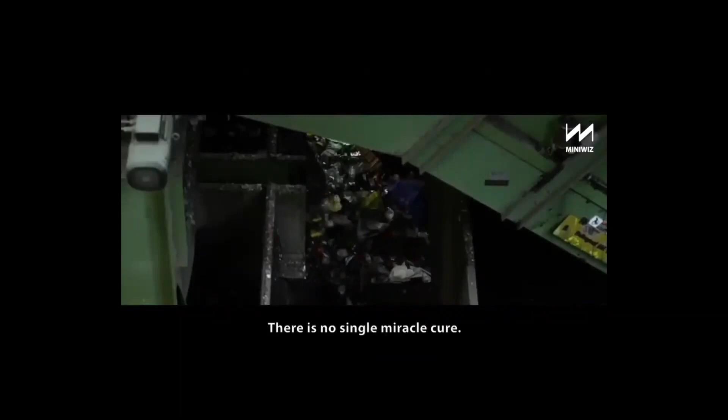But in general, we've been around for... we want to matter to the non-toxic future of our world. At Miniwiz, it is our mission to change consumer behavior into a circular one. It is the only way for us as a species to sustainably consume our limited resources. Overconsumption is a complex system problem - there is no single miracle cure. We want to matter by proving human consumption can be satiated with our very own trash. We have dedicated ourselves to turning decades of environmental pollution into solutions that will enable us to live sustainably. We want to matter, so we turn ourselves into magicians of trash, inventing new ways of transforming our everyday trash into high-performance works of art.

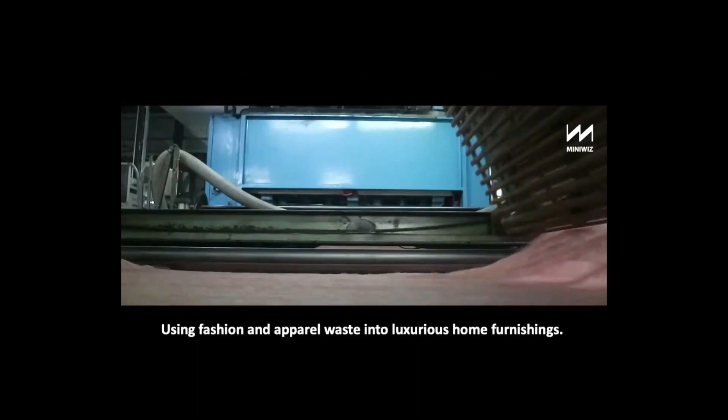We turn milk packaging into the hottest sportswear fashion, plastic bottles into luxurious textile, cigarette butts into furniture and glasses, using fashion and apparel waste into luxurious home furnishings, masks and PPE into cell phone chargers, single-use medical waste material into hospitals, using smart AI technology to make decentralized recycling and upcycling possible today. We head to Taiwan for this report - a company designing solutions to overcome a mounting problem of a mountain of trash. From furniture to hospital wards, all built from waste, one CEO is on a mission to revolutionize recycling. His team has used waste to develop over 1,200 different materials for use in construction, turning different kinds of waste, like plastic bottles, into materials for buildings and products across the world. We want to matter, but unfortunately we are out of time. Please join us in upcycling today's local pollution into circular ESG building solutions of the future.

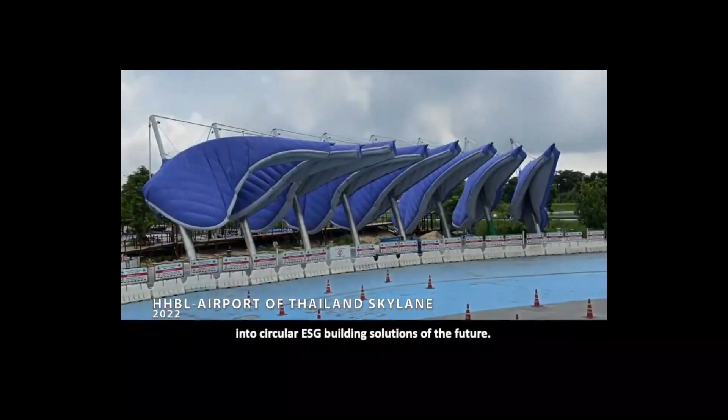Okay, so first of all, are you guys all confused with how you recycle these? Do we put them in the recycle bin or not - the coffee cups? I mean, obviously it's a trick question, and you guys are a bunch of engineers, looks like, yeah? So it's a trick question - do we put them in the recycle bin or not?

Yes, I see nodding in heads. But welcome, these days are internet societies, you can check. Can you recycle coffee cups or not? Paper ones? No, you cannot.

First of all, it's contaminated with organic waste. Second, it has a plastic film in there, and you need a dedicated recycling line. On top is polypropylene, which is a cap, and normally you have to put it separately. Does Singapore recycle those? Nah, definitely not. So anytime you see a recyclable coffee cup, that's greenwashing.

And that's what we are fighting against, actually. There's a lot of greenwashing, but greenwashing is good, because without it you cannot even get to what we are trying to do now, okay?

People talk about microplastic. If you don't recycle your coffee cup properly, all those little bits and pieces of PE actually get broken down and become microplastic. On all the beaches, this is the stuff you can see. At the molecule level it's actually quite a big chunk, you can still collect them.

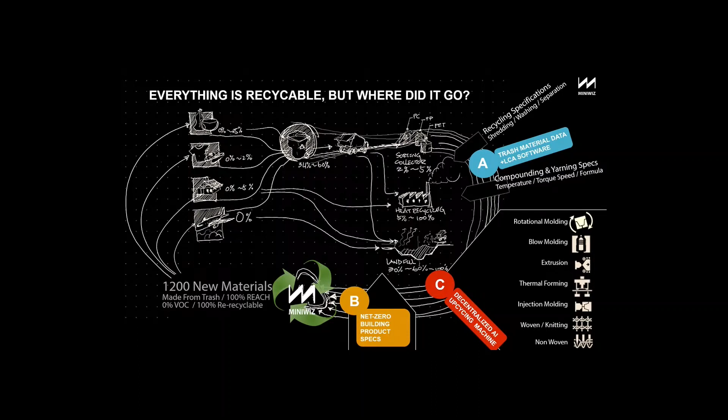And why architecture? I think this is very self-explanatory. All the carbon footprint is in building, 50%, or it doesn't matter how you calculate it, 39%, 40%, doesn't matter which data you use. Basically, it's the highest single industry that uses the most carbon footprint. Okay, so period.

Unfortunately, why do very few companies do this? I don't know, actually. But I think there's one very simple fact, is there's no money in it. The second thing is it's really difficult to get in. Have you guys tried to build your building before? Anyone here? It's not easy. If you try to build your building, there's a lot of suppliers and lots of problems with legal stuff. So it's a very chaotic market, and also has lots of status quo in between.

And we're going to build more buildings until 2060. And where is most of that building going? It's not in China. Do you see that bubble, the biggest one? Africa. That's where most of the building activity is going to happen.

So if you're going to decarbonize, you want to reduce carbon. By the way, reduce, reuse, recycle. The easiest way for you to reduce carbon is reduce. Just don't use carbon, right? Use as little as possible, right? So this is what we do.

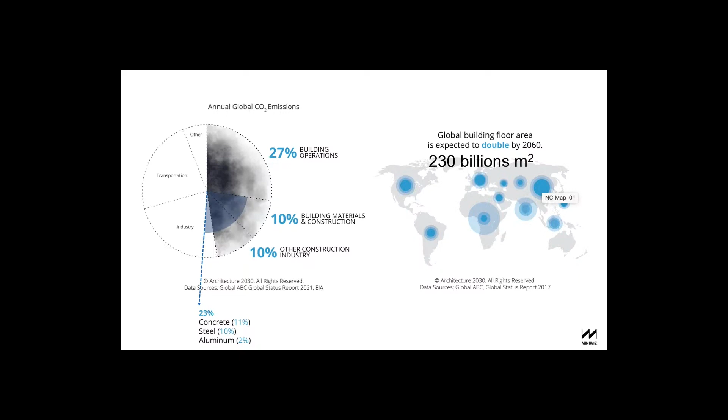So I kind of basically summarize for you. We only do A and B and C, which is data and software. So you're able to calculate when you use this material, what type of carbon footprint is happening, and how is that linking to all the different engineering data. The second is obviously B, which is building product that has a different set of specifications that can already be pre-chewed and pre-manufactured into different locations.

Decentralizing is the key. If you actually ship trash around, like what I was talking about the bag, horrible. That is the antithesis of what we are trying to do. C is then you have to scale those machines locally in a very efficient way.

And we have to link that into a real estate development life cycle. A lot of people forget that what they're selling into, you're selling into the biggest user of material, real estate companies. And real estate companies, the one guy they are most scared of is the government. Because the land is from the government, it has public goods, it's public facing, it's permanent, it's linked to tax policies. You got to think about it. That is the one single thing, so that's why with real estate developers, if you want to talk to them, you better be talking to the government.

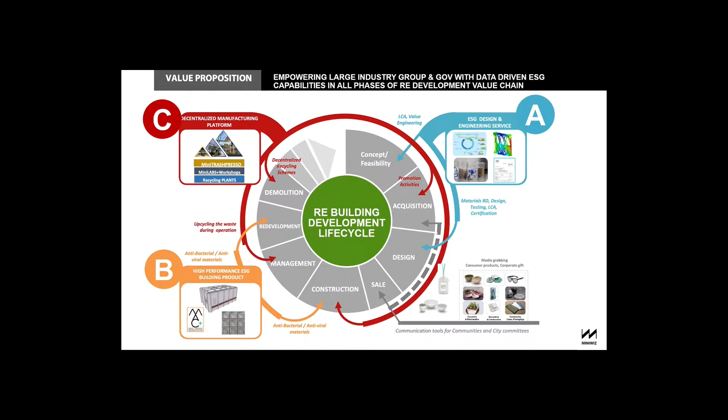And you don't want to scale what other people can do better than you. You only scale the part where we accumulate enough knowledge to add value. So we only scale that part, I think I summarized there.

But we can work with lots of creative communities. We work with, for example, the famous Dutch architect, famous Norwegian architects, Snohetta. We work with Zaha Hadid, and we help them deliver certain low carbon modules within their buildings.

And we built a lot of infrastructure buildings before, and that's where we got our thing. This is the biggest e-waste recycling plant. It has 6 plants inside, one of a big university campus. I just want to point out the machine. There's a solar power machine there. It's actually Jackie Chan's university.

So he says nobody's using DVDs anymore. So can we recycle DVDs? So we recycle DVDs on site using solar energy and process that whole thing into the facade of this university campus. So the facade is actually made directly on site.

And of course, you want to use the most abundant resources that are available to you locally. So this is in a Thailand airport. This is actually quite big, giant air mattresses, 2,000 square meters with 8 columns. And how is this supported? Air. We're using air as a mechanical tube, yeah? And then we have recycled polyester, 2,000 denier, structural strength, to be able to power that.

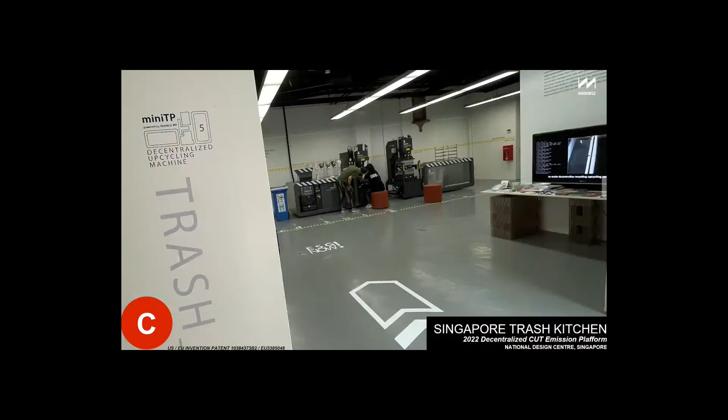Where trash happens. And this was in Singapore Trash Kitchen. This was in the National Design Centre. Now it's in Sentosa. Hopefully you will see an activation in Sentosa permanently there soon. And this is in Taipei, where we link with universities.

And of course, everything can be robotic. It's all computer-controlled drones. So pretty much you can make it into anything.

Thailand - this is a smaller size. So basically, this is a baby recycling plant designed to be air transported and fit into elevators. So every machine is just 1 ton, okay? And then they can be folded into a Swiss Army knife, and then pushed into an elevator and an airplane, so we can transport them.

So we have 7 of them around the world. One of them is being set up in Boston, linking with MIT and Harvard, and with Nan Fung Group at their new life science building.

The other one is community size, a village scale, where a community - just imagine HDB housing - can take that trash directly, locally, and directly turn it into something else.

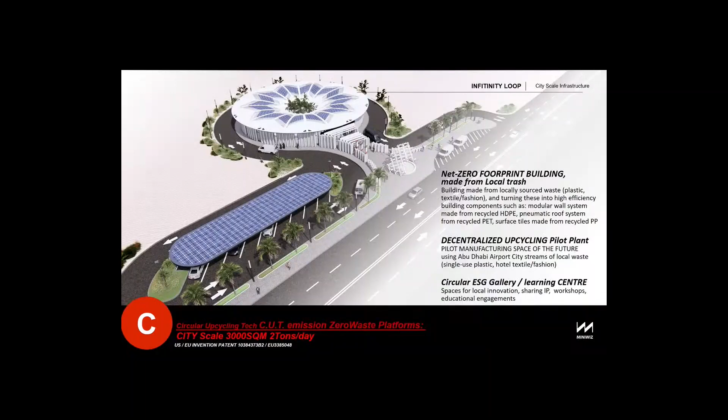And this is what we have in Taiwan, and we are building this in UAE right now - the big ones. So we're currently building much bigger ones there. The next thing is data, how we link that with data. Everyone talks about carbon footprint.

Sustainability is a dirty word, but actually there is a standard started by the Europeans 40 years ago. It's carbon trade, based on ISO 14064, and this has been standardized for the last 30 years, for those who don't know.

There's a lot of greenwashing consultants out there claiming there's so many different ways to calculate carbon footprint. Sorry, there's only one way, and you can actually download it. Please read into that. It looks like a complicated process, but in reality it's just a bunch of data put into a formula, and that formula is very straightforward.

Transportation, energy use, and what is the result of that? You know what's the result of that? The global warming potentials of that data.

And then the next thing is the modularization of all your design, architecture design. Unfortunately architects still design in 2D, which is horrible, yeah? They still draw AutoCAD, it's still single line. Just think about it, single line. The line just has distance data, right? Point to point, 2D. But in reality, you want to get to that, you need to have everything in blocks and 3D. Unfortunately most architecture software, I know there's BIM systems starting, but that's from the engineering side. On the design side, almost not really, okay?

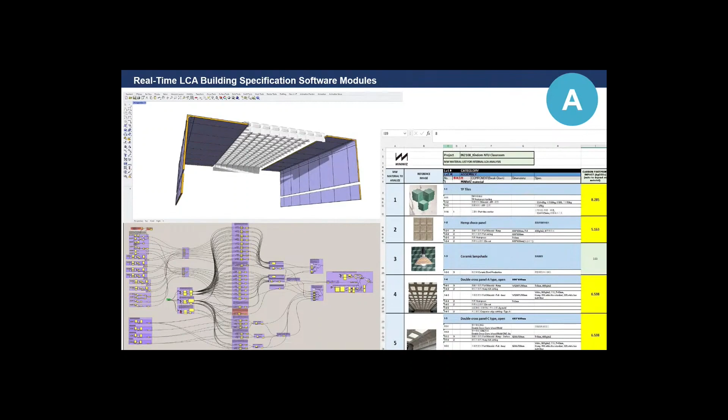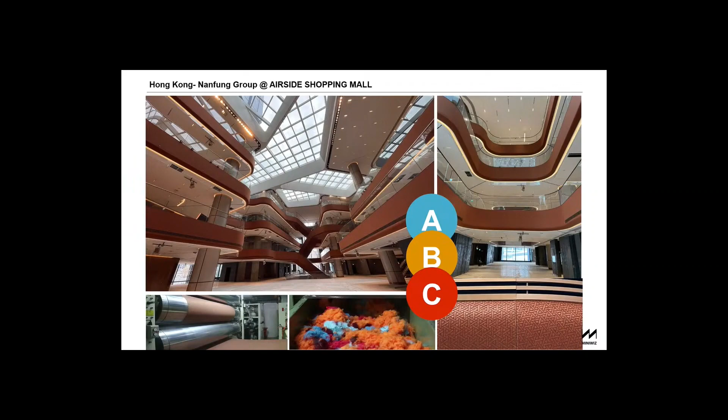And so that you can turn into all these fancy places. I just want to show you all these fancy places that you can build with the same logic. So right away you can do carbon footprint analysis. Salad Stop in Singapore, headquarters of real estate companies, one of the biggest shopping malls currently almost opening in Hong Kong. You can see all that orange and carbon footprint and the modular system I talk about.

The last thing is wherever we go to the local collectors, we want to figure out the local trash ecosystem. I was in Africa, I was in Mozambique. I was just so happy and surprised that in reality the recycling system is actually complete within the plant. It's combining 4 or 5 different companies in Taiwan together, from buying the trash, all the way to sorting, all the way to pelletizing, all the way to the machinery.

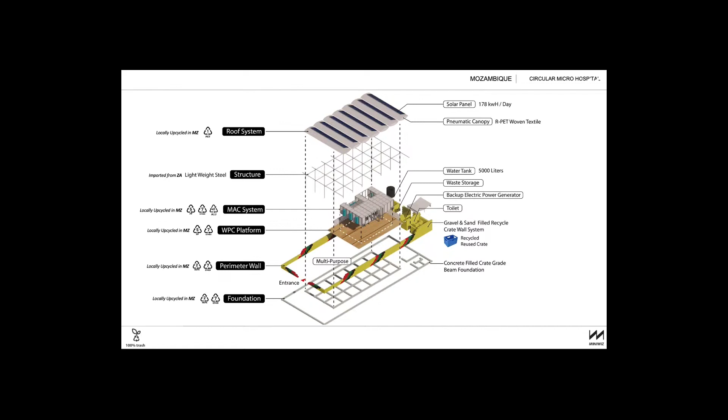And then we are building this for the UN Habitat and with different foundations that's sponsoring these, so they can have these medical grade surgery rooms, ICU rooms, to reduce contamination and increase healthcare. So this is kind of where we are at. We can talk about that more later.

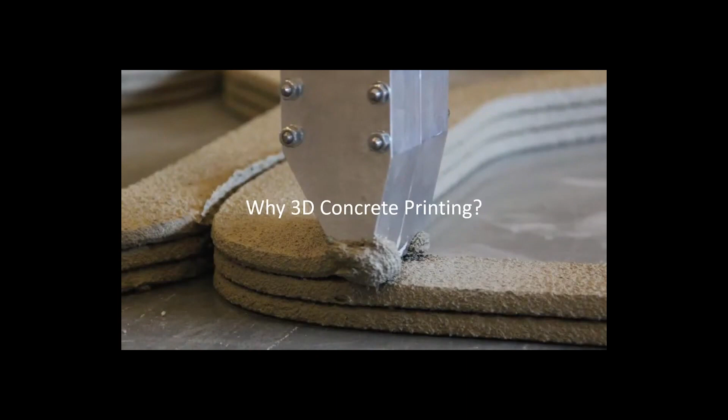And since then, it's still very important to talk about why we do 3D concrete printing.

The first one is really about construction productivity. If we look ahead the next 30 years, we see there's a 30% increase in demand for housing, for infrastructure, and for anything related to the built environment. But we also see there's a minus 30% for the workforce, for the labor. To mitigate these differences, we see that digitalization, automation, and 3D concrete printing can be one of the methods to mitigate these differences.

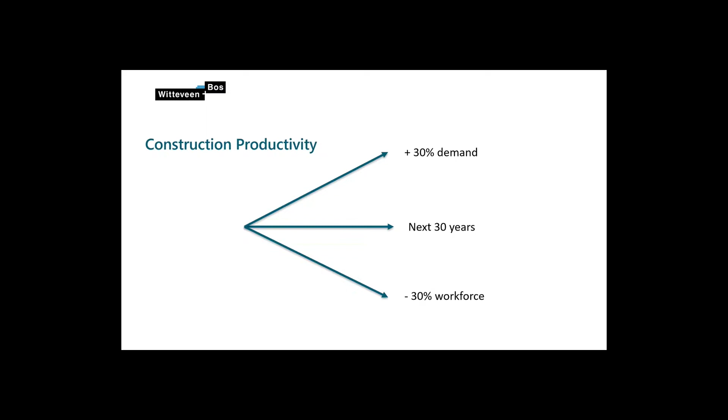Another aspect is the design to construction process. A lot of us still use 2D drawings even though we have BIM and 3D models. Most of the time we produce a 3D model but still generate 2D drawings, hand over documents to the contractor, and the contractor teaches the builder how to build it. So there are many stakeholders involved, many processes, and the process is quite long and complicated.

The reason we do concrete printing, the reason we do digital construction, is we can directly produce and fabricate our built environment using digital data. So it can come from BIM data or a 3D model, and then we translate this digital data into bits and bytes, and use a robot, a 3D printer, to print. So in this process, there's no 2D drawing involved anymore.

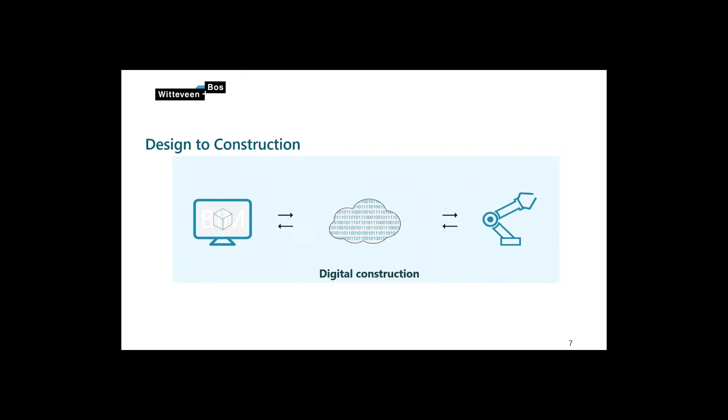Sustainable urban solutions in 3D concrete printing — these are the things we think could add value to our built environment using concrete printing. First, we actually use less material. For example, the bridge we printed in the Netherlands uses around 50% less material compared to a traditional bridge. Less material also means less CO2 emission.

When we print concrete, the biggest difference is that we don't need any formwork. The concrete we print needs to be flowable, from the mixing system to the pumping system, all the way through the hose and through the nozzle to get printed. So the material needs to be flowable enough, but also strong enough to support the layer deposited on top. But there's no formwork anymore.

Traditionally, you have to build a formwork, put the reinforcement in, then cast the concrete. Once the concrete hardens, you remove the formwork. So in a way, you're building your structure twice — first the formwork, second your concrete structure. When we print concrete, there's no formwork anymore.

Fourth, we want less dependency on labor — in concrete printing, the robot can do most of the job for you, streamlining the process from design to production. We also have higher design freedom in shape and texture. Printing a curved shape or a straight one doesn't really make a difference in concrete printing, so you have more freedom in design.

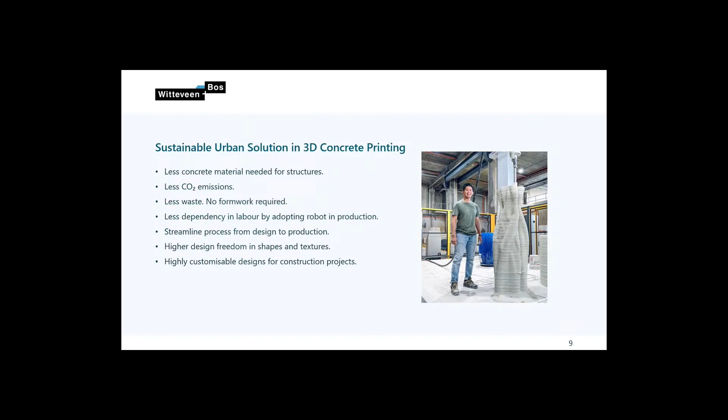But from a technology perspective, this is the challenge: everything we print is fresh concrete, and fresh concrete is like mud. This was supposed to be just a straight cylindrical column, but it buckled and tumbled down. This happens when you print too fast, meaning the material doesn't have enough time to harden and stiffen to support the weight deposited on top. So we cannot print too fast.

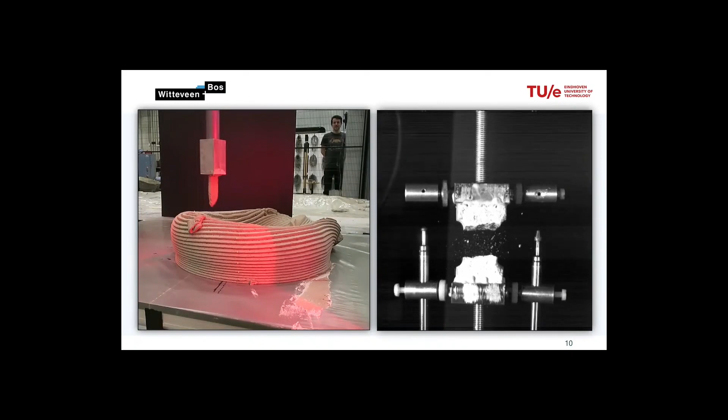But if we print too slow, meaning the layer we printed already dries up, when we lay the next layer on top you don't get any bonding, so we lose structural integrity. But luckily, we can't print too fast, we can't print too slow, but this window is quite large, which gives us flexibility to design.

So this is where research comes into play. We basically use a geotechnical testing method to test our concrete printing material. We had building codes for concrete structures, but we don't have building codes for layer-based extrusion process concrete structures. The biggest difference is that if you print in layers and test it, the structural behavior is actually different in three directions — X, Y, and Z. So we do a lot of research with universities to look at the structural behavior and understand the mechanical properties for use as a structural material.

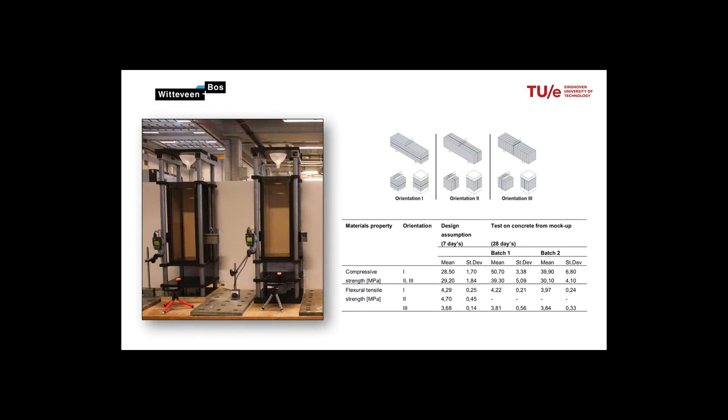So in 2017, we thought, okay, now we understand the material and have it tested, maybe we can try using concrete printing for a real project. The first one we did was a simple piece of urban furniture — a picnic table that we still use in the Netherlands.

And this is the printing process, so layer by layer. You can actually see this is a gantry printer, and the nozzle is always turning to follow the tangent of the print path. We thought, okay, this should be quite easy to print, just print layer by layer to follow the print path, and around 60 layers, then it's finished.

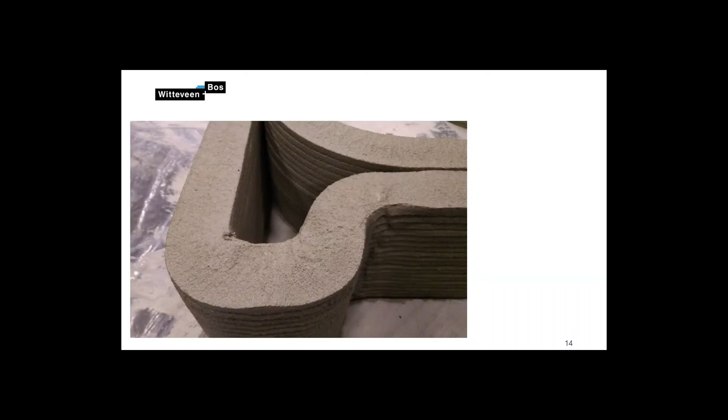But soon enough, we find out something very interesting and very challenging, is the corner. Every time when we have this sharp turning, the sharp corner, and also because the nozzle is always turning to follow the tangent of the print path, this is what happened.

During this turn, the material deposition is different between the inner radius and the outer radius. So the inner radius always got compressed a little bit, and the outer radius always stacked a little bit higher. For one layer, there's no problem. Two layers, there's no problem. But this difference starts to pile up.

And there's 1 layer, 2 layers, 3 layers, and eventually it will collapse. So we really need to take this into consideration and not just think concrete printing can just lay down - it's also about how you adjust your material properties.

So we very quickly used computational design software in Rhino and Grasshopper. When you design the print path, you can immediately see if the curvature is too sharp, which will cause this inner radius and outer radius issue. So when you make the design, you can already analyze it, then know that your design will be printable and will be okay.

And yeah, this is our very first project, just a very simple picnic table. Last year I went there, and it's still in very good condition.

And the next one, we go to an infrastructure project. So this is the very first load-bearing bridge we printed in 2017. It's 8 meters in span, 3.5 meters wide. Not a very interesting design, but we were trying to understand whether it would be possible to use concrete printing for public use, for load-bearing structures. And it actually caused a lot of discussion with the government, and how do you make sure this layered thing is durable?

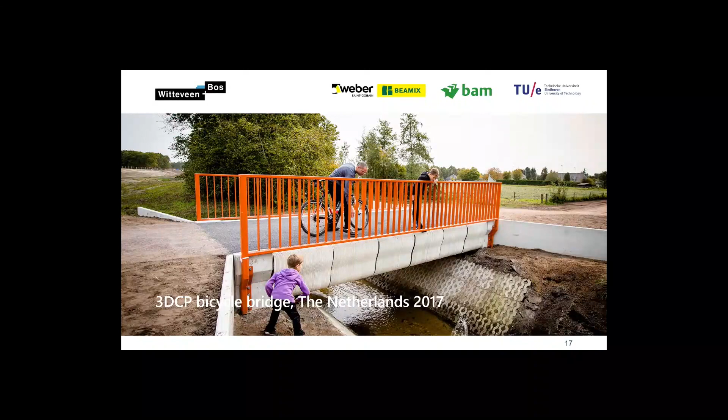So, yeah, everyone had a concern. Everyone wanted to know how can we control this risk, control the uncertainty. So risk is not the issue - the main one is how do you manage your risk.

So before we printed a full-scale bridge, we actually printed a scale bridge, a 50% smaller scale bridge, and we got it tested through destructive testing, using a 4-point bending test. Just trying to understand, does concrete printing structure behave the same as normal concrete? And in the end, yes, it's still concrete material, it's still a concrete structure, it behaves just like concrete.

Then we go to full scale. So this is actually the cross-section of the bridge. We print a honeycomb structure, like a hollow core structure. And also a very big difference is we don't fill it up - we can directly use the printed structure as a structure.

So most people, they only print the skin, they put the reinforcement in, they cast concrete. That is using concrete printing as a permanent formwork, which is good as a step in between. But what we are after is this: just placing the material where it's needed and not filling it up. This can save material, and it also has a customization purpose.

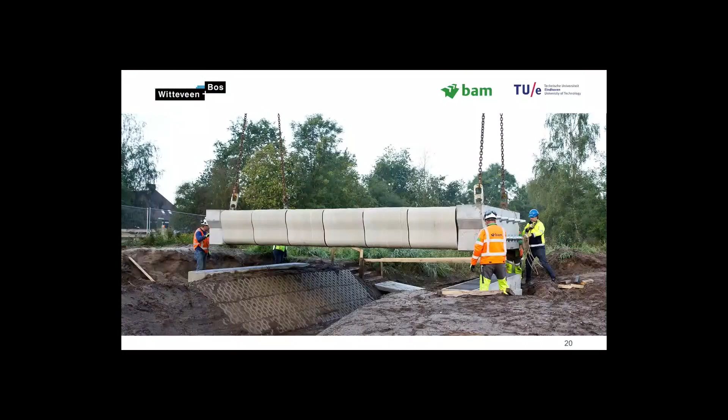And then we put the bridge in position. And finally, since this is the very first concrete printing bridge, everyone had a concern. The first day when we opened the bridge, we invited our contractor, our builder, our engineer.

Cycling is the thing in the Netherlands. We asked them to cycle through, just as a final test, since we did the design engineering and we are liable. We did some cycling and got it through just to prove that we are confident in our design. So we know this very first bridge is not very beautiful, the safety factor is quite high, and it also doesn't really introduce design freedom, but at least it was the first one trying to use the innovation in a real practice project as a load-bearing structure.

The next one, we take this one step further, which is also a bridge, but the span becomes 30 meters, and we introduce this curvy organic geometry that can blend into the environment.

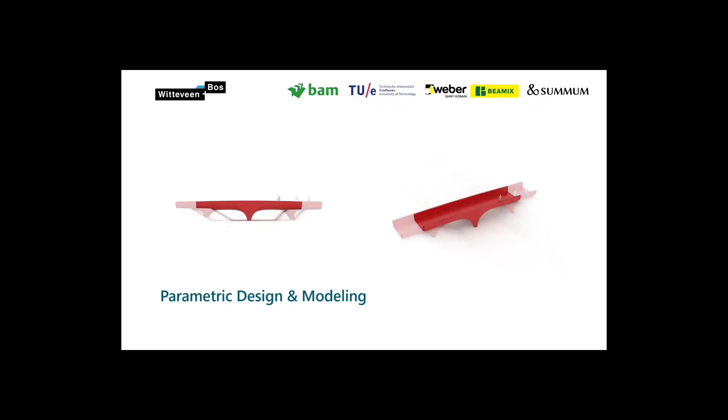And soon we realize that for this kind of concrete printing bridge, it's very important to have a parametric design model that can control, for example, length, width, height, so you don't have to repetitively design every bridge again. Once you have one good parametric design model, you can easily apply what you learned before to the next bridge to save time and focus on what's unique in the next project.

So this is the printing process for one part of the bridge. The printing strategy and pattern is still relatively similar to the previous bridge, still like the honeycomb structure. For example, the left image is the column.

We print it upside down, and during printing, we put this lightweight aggregate to support it because we're still printing fresh concrete. If you have a crazy overhang, it will always collapse. But by introducing this temporary support, that allows you to have more design freedom, different curvature, incline angle to fit with your design purpose.

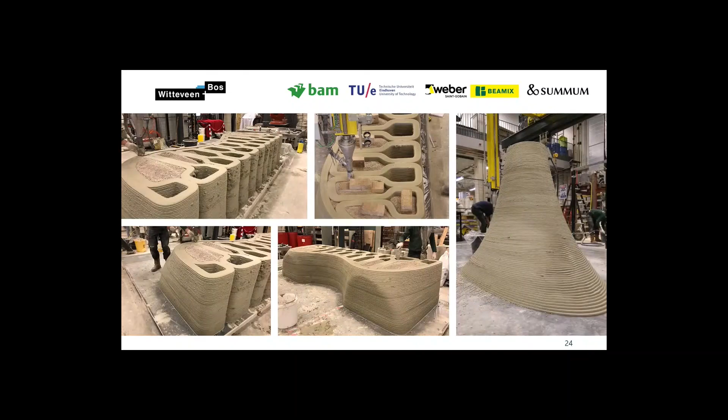So this is during the construction process. Every span is 6 meters, 6 meters, 6 meters, and you can see how nicely the curvature is blended into the printing process. And this is the final bridge.

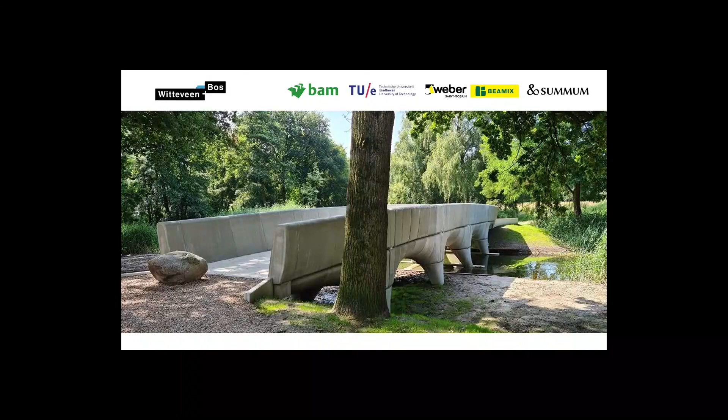So these two bridges and also the picnic table were done in the Netherlands, but we also do all different kinds of concrete printing around the world.

Of course, in Singapore, we always talk about how to push construction productivity, how can we reduce the dependency on labor. And in 2018 to 2022, we actually worked on this 3D concrete printing project for HDB.

And the very first task was: how can we print concrete? Because Singapore, unlike the Netherlands, doesn't have a winter time and summertime. In the Netherlands, during different seasons, we use different parameters to print concrete. But in Singapore, the weather is actually quite stable, quite constant. It's always hot, always humid, and we figured out Singapore is actually relatively easier to print because the environment is very stable. It's humid, so that's good for concrete printing to cure.

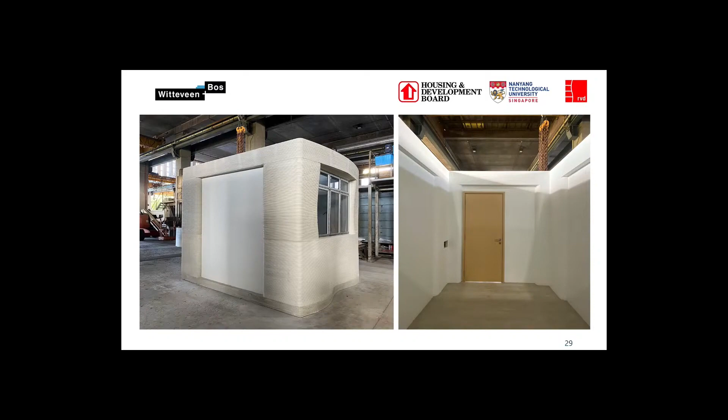And this is the last one that I want to show you, how we print this modular unit.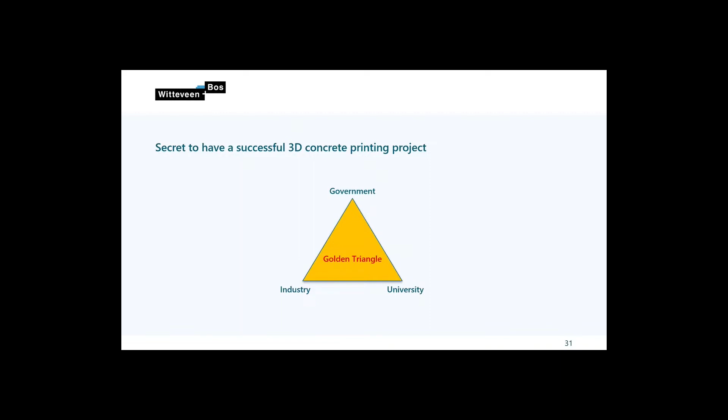All right, as Sean has mentioned, 3D concrete printing was still at quite an early stage. So now, to give us a more global perspective on 3D concrete printing, we have invited Simon Klimber, the co-founder and head of APAC of COBOD.

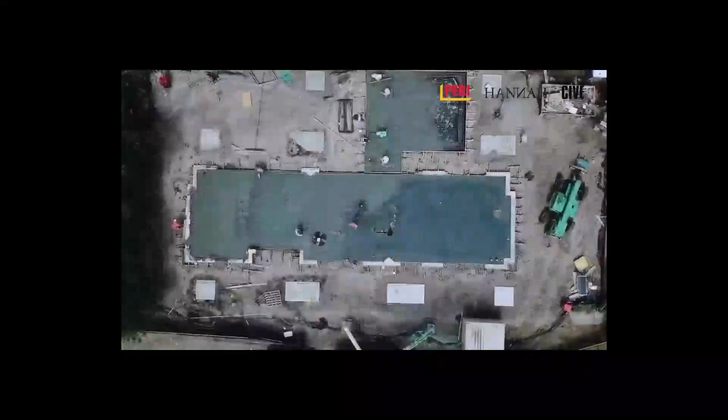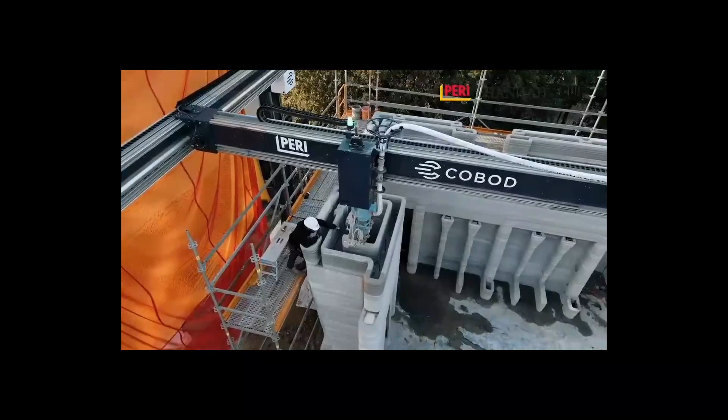So this is a house that has been done in Texas by PERI today. It is being finished and fitted right now, so it will probably be PR'd hopefully soon. This is a video showing the build-up process of our machinery on site and printing. You can see it's a big modular gantry system. Here they're trying to use the form freedom of the technology, the lack of formwork, as we've heard about before, to really create something unique here. This building is exactly made as a high-end house to be able to really play with the light.

So, Cobod, who are we? We are a technology provider. We make and do R&D on the technology that can enable people around the world to 3D concrete print.

We've sold more than 75 machines all over the world. We have 10 machines here in the APAC region. Most of the machines are in the US today. We're a Danish-based company, but with local offices here in Kuala Lumpur, not too far away, and in Miami to service the American market.

So we have the approach that we can't do everything. We need strong partners in order to bring this technology to fruition, and therefore we focus on the core technology, the 3D printing technology, how to extrude concrete and fluid materials in the right way, and then we work with partners on materials and so on. That means we're actually open source in terms of material, and we work with various different partners around the world on how to apply the technology in the best way possible.

So our backing, we're very proud to have these companies as our shareholders: GE, Holcim, Cemex, and PERI, all helping us to bring this technology to the position it has to be in the future. I think it's quite significant here to see, and it speaks to the partnership model that we have, that we have both Cemex and Holcim as our shareholders, actually competitors in their fields of cement production. However, because no one partner can do everything around the world, we need a diverse portfolio of partners to work together with.

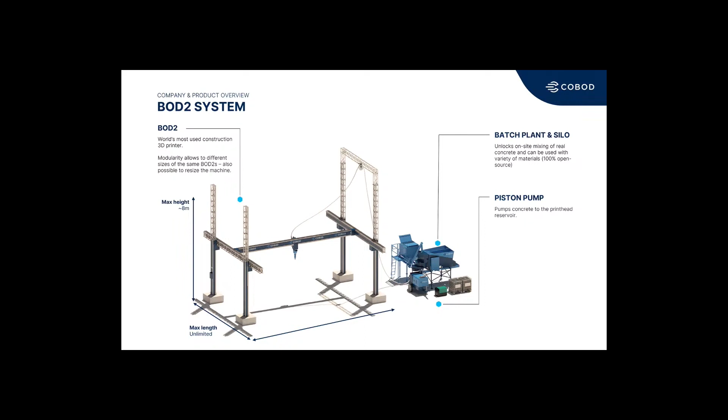So if you look at our system, it's a modular gantry 3D printing system. It can either be a 5x5 machine, or you can go all the way up to 3,000 square feet in 3 stories height, directly printed on site. We are working with even bigger machines now as well for windmill turbine tower applications with General Electric. So the max width is 12 meters, and you can go very, very long if you want, and approximately up to 8 meters height, but one of the projects I'll show you is actually directly printed 10 meters on site if you elevate the machine itself.

So if we look at the benefits of 3D concrete printing, we generally see 4 answers. These will be different depending on where you are in the world, and for some will be more interesting than others. I'll focus on the sustainability part today, but I think it's important to mention that automation and the speed of construction are 2 very relevant factors as well. We heard from Sean, lack of skilled labor, the housing need is really growing, so these are important things as well.

So when we speak about sustainability, we have to speak about 2 things: the form freedom that we can use to our advantage, and the second one is the materials. Now we have a new technology, a new way to put out our building materials, which opens up the doors to think new in terms of material as well. So we have been working a lot on making our system receptive to a lot of different types of materials, you could say.

So we're open sourcing materials. We have been working a lot on making this real concrete and not just mortars, because most of the prints you will see are mortar-based prints, meaning high cementitious rate and sand. We want to print with real aggregates up to 12 millimeters of size. These can be recycled aggregates, these can be normal aggregates, and a lower cement content because we have additives to do the work for us.

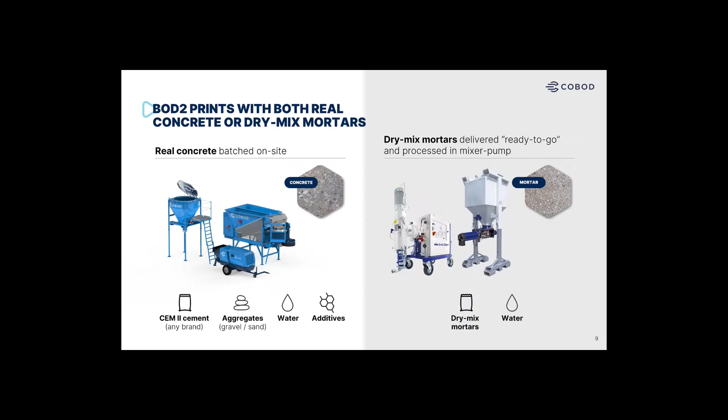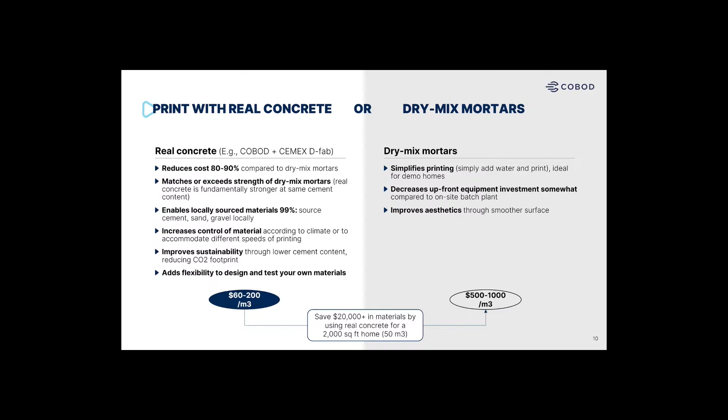So if we look at that in numbers, we have the opportunity to locally source these materials because we're batching them on site. We don't need to have a dry mix that's made in specific places and brought in. This gives both a CO2 benefit, with lower cement and less transportation, but also a big benefit in price. We typically see somewhere between 5 to 10x in price when you work with mortars instead of working with locally sourced concretes.

So how that works is we take 99% of the material locally: the sand, the gravel, the water, the cement, and it could be other binders as well, it doesn't have to be cement. Then we have an additive mix, and our technology can dose that additive to make this printable, because it's a very special material we need in order to stack it.

We need it very pumpable when we first mix it, to get it through up to 40 meters of hose in some cases with our biggest machines. But when it comes out, it needs to stand, right? It needs to retain the shape that we intended for it. So with 2 additives in the printhead itself, and with additives at the batching plant, we can actually achieve both these contradictory parameters. And that works really well.

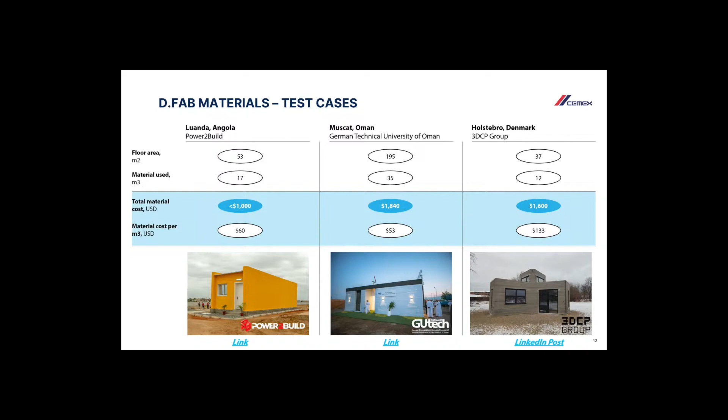So the second point is the form freedom that we now have gained. We are not bound by the formwork anymore. We can actually use the shape to our intention. So instead of building and constructing how we've always done, let's now use the form freedom of the technology to create something new.

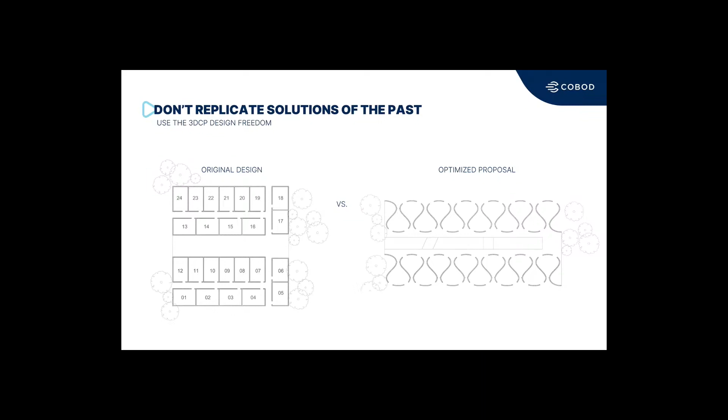If you look at these 2 cases, I'll come into a real case in a minute. By utilizing round shapes, we have much more material-efficient shapes for gaining the same type of area. For example, this case, housing units for the Philippines, 24 of them. The proposed design was the one on the left, a standard square design of buildings. On the right, we did this very natural looking shape, which utilizes round forms. The beauty here is that not only do we save about 10% on material when printing this compared to the other one, we also gain a lot of other benefits from it.

We get something that's more aesthetically pleasing to the eye. We get something where the natural shape funnels the wind through, so you get a better inner climate. All in all, also a better printing time, because we can do this in one continuous print back and forth, so we have no travel time in a design like this. By thinking creatively with these new possibilities, we can actually optimize on a lot of parameters.

A real case here, just printed in Germany by one of our clients, Röser. They've been working with MC Bauchemie. This is a geopolymer print, a prefab print in their hall and taken out to site and assembled. This binder material actually has 70% less CO2 than a standard cement. So by unlocking the free mindsets that we have with the new technology, we can then also look into new materials.

On the end notes here, I just want to show a couple of projects done, so you can see it's actually happening. It's in real scale today.

This is back in 2020, a house printed by PERI in Germany. The beauty here is they utilized the design to optimize on the other trades afterwards. By enabling through design that all the holes for plumbing, electricity, and so on were already there, the conduits were there in the printed design, they saved from 13 days down to 3 days for those other trades afterwards.

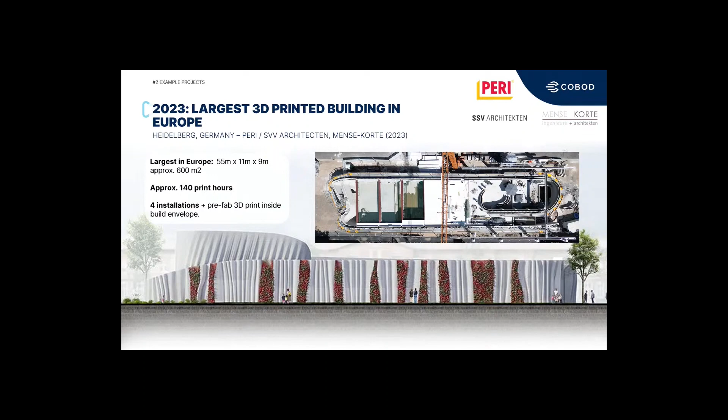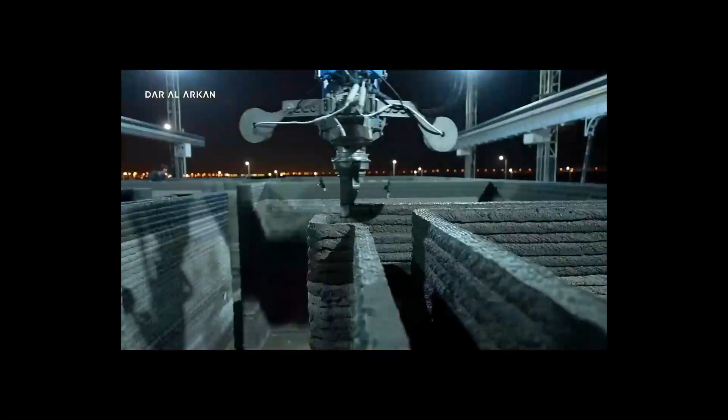To show a bit of size here, we have the biggest villa printed in one go as well. This is why I say we can go up to 10 meters. They printed 9.9 meters directly on site in Saudi Arabia. It's 345 square meters printed in one printer installation. I'll just show you a short video of that as well. This is printed with real locally sourced concrete. And if you're wondering why it's always dark in the pictures, it's because it's too hot during the day to print there, since it's in the middle of the desert.

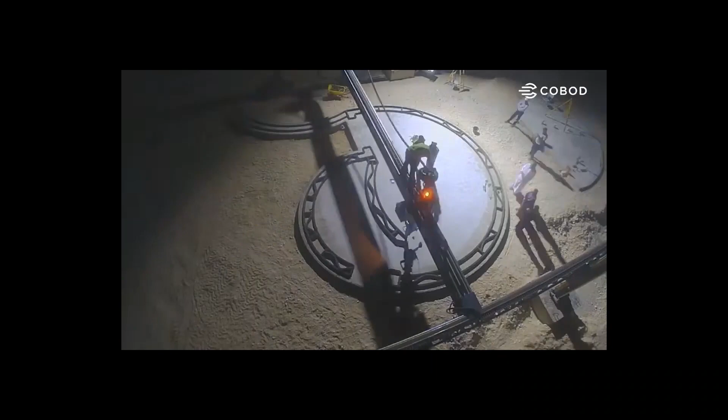Just to show a little bit about the speed as well, I want to show you this from Oman, another client of ours that utilizes the concrete technology. One of the beauties about concrete is that because you have large aggregates and additives in the printhead, we can print not 1 centimeter layers, but up to 5 centimeters of thickness. That cuts the printing time by an immense amount. These guys are Geotech in Oman. They printed 3 houses in 8 days, from start to finish, including moving the machine, a big gantry system, 3 times, which is quite significant. Locally sourced materials again, hollow structure walls, very organic design.

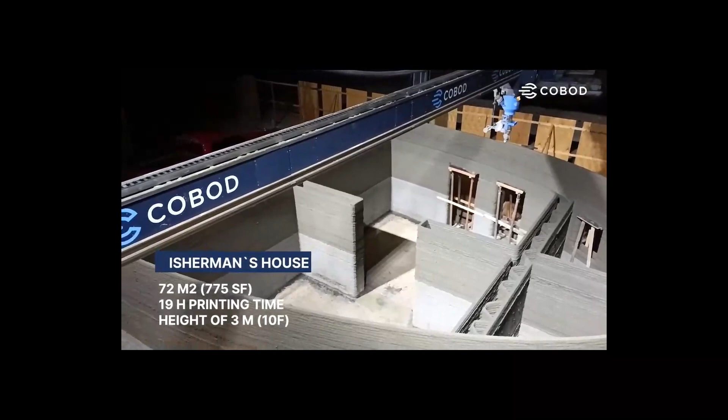Just on an end note here, it's not just houses that we can make with this technology. I think we have to think out of the box as well. We have some clients looking into infrastructure. We have GE looking into windmill turbine towers. Tank applications we really trust is a big thing. We need biodigesters for biogas with all the recycling of food waste. We need water tanks in different places in the world. Everything that's made today where you could benefit from freedom of design is basically something this technology could be used for.

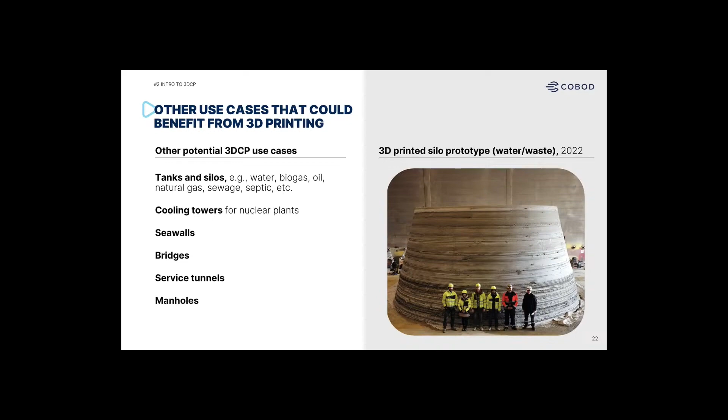All right, so as Sean and Simon have both mentioned, with the possibilities that 3D concrete printing brings, there are also some limitations and challenges, especially when it's related to intricate and fine details like rounded structures. So for the next topic, we're going to zoom in a little bit onto thin shell concrete structures like the one over the Pantheon, Rome. They allow us to build complex curved structures, but it can't be easy to build, especially with additive manufacturing. So to enlighten us on how that can be done, please join me in welcoming the Principal Architect from Type 0 Architecture, Pan Yi-cheng.

Hi, good afternoon. I am Pan Yi-cheng, Principal Architect of Type 0 Architecture. I must confess that I'm a bit intimidated after these great guys have presented, but also super inspired. I guess today I'll be sharing about my recent dabble into additive concrete printing, and probably show you the mistakes that I've made. So a bit about my company: we have been doing design and make for some time, so DFMA is really ingrained in how we practice.

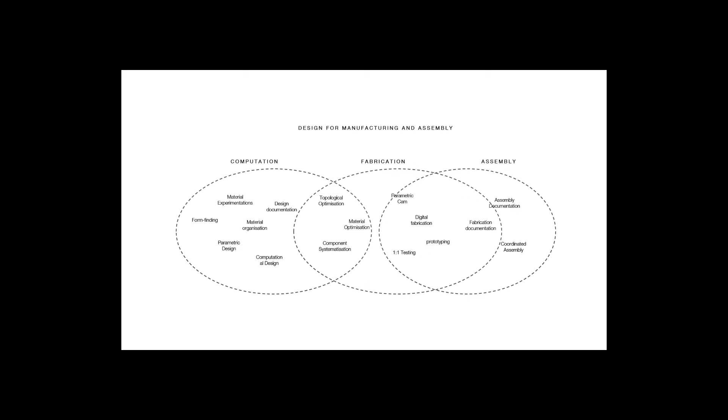So to that end, we have structured the company to look into computation, fabrication, and assembly in a way that through every project, we inform each other in terms of all these different facets of running an architectural practice. And over the last 10 years, I've set up, assembled 3 companies looking at different components of design and fabrication.

So I have Produce, which is design research. We look into material research, particularly in timber. Then Superstructure is a digital fabrication company - we have CNC machines and are slowly getting into additive manufacturing. And then Type O is my architecture practice. We look into how we can change building typologies through fabrication.

So a little bit about the history. Produce started first with a CNC machine, a simple one, a 3-axis on the ground floor, and our studio on the 2nd floor. Then in 2017, I collaborated with a material supplier in Singapore and started Superstructure, and now we have our 5-axis CNC machine. And we just modified a 3D printer to print in clay.

And lastly, Type 0 Architects. So in our structure, these 3 companies work together on some projects, and we set up a computational team where we use it as a base to internalize all the findings and all the learnings through every project. It's like an archive where we can use this knowledge to project further into other buildings and other type of workflows. So our projects range from very small furniture and products to buildings to even urban plans, all utilizing a computational workflow. I think of it as a larger project called project synthesis.

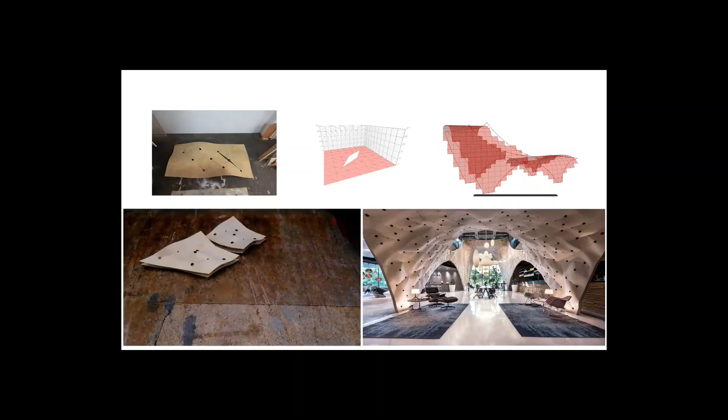So our early works involve studying properties of plywood. In this case, using 2mm plywood and a kind of simulation of its material property to create almost like a tensile membrane of 2mm plywood.

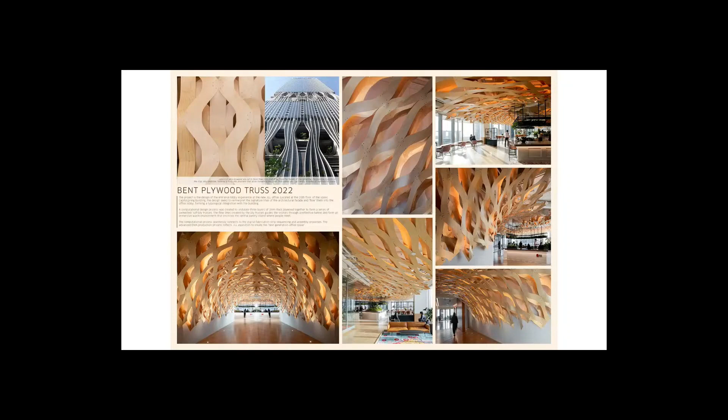This building, I would say, is a building within a building. It's still in Marina Square, been there for 5 years now. So if you are still around, you can visit it. And then recently, we created a bent truss structure, likewise using plywood, for a canopy within an office space. This is at CapitaSpring, and currently we are shortlisted for World Architecture Festival, one of the categories.

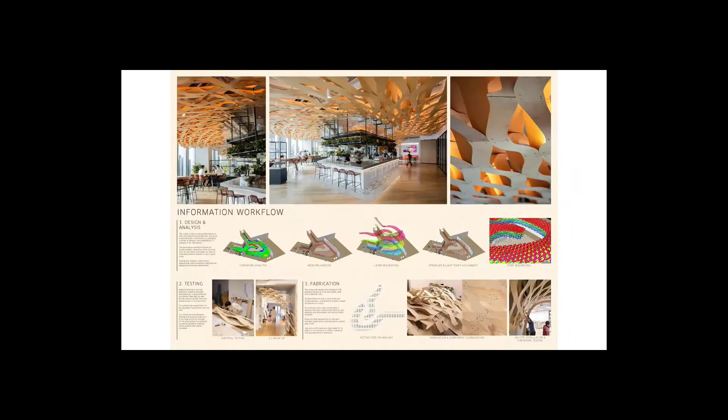Currently, we are working on the first mass timber house, a single-family house in Sentosa. So really looking forward to showing that maybe next year.

But now, let me talk about additive manufacturing and our early stages of playing with it. So we tried to do a thin concrete shell structure, basically looking at how it can create a large span space where activities can be very flexible underneath it.

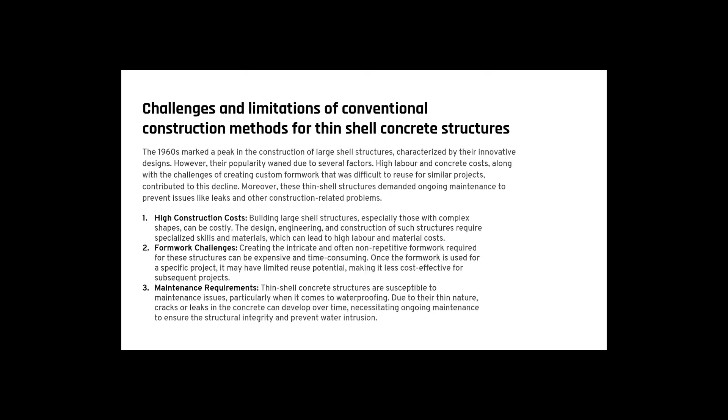But the problem with doing shell structure is that there's a lot of formwork required, a lot of temporary structure, which makes it very expensive to build and very tedious. So how can 3D printing concrete be utilized in this case? These are some of the typical challenges that we face when doing shell structures.

And our first opportunity to look into this is to utilize 3D printing and what it can offer to develop something that's organic, non-uniform, and just to test the limit in terms of concrete 3DP. So with that, we hope to eliminate the formwork, allow for high level of customization, create something that's rather complex in terms of geometry. We would want to utilize its precision and material efficiency.

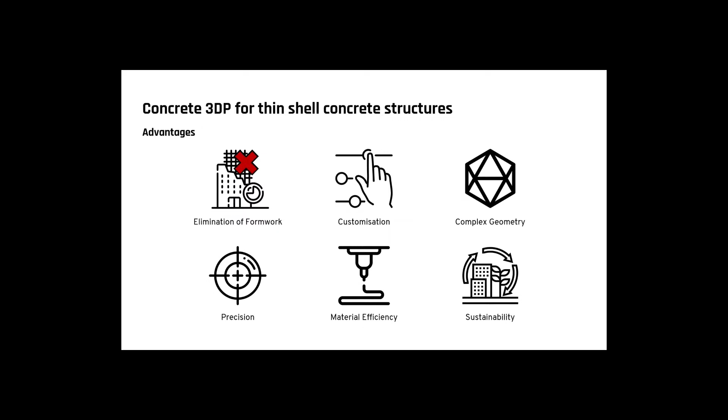So this project was made possible by Keppel Innovation and Technology Group. And like that golden triangle that was shown earlier, this triangle is created by Keppel, involving Woh Hup, a very seasoned contractor, ourselves as the designer as well as a tech partner, and Chip Eng Seng, who has a concrete 3DP plant in Singapore.

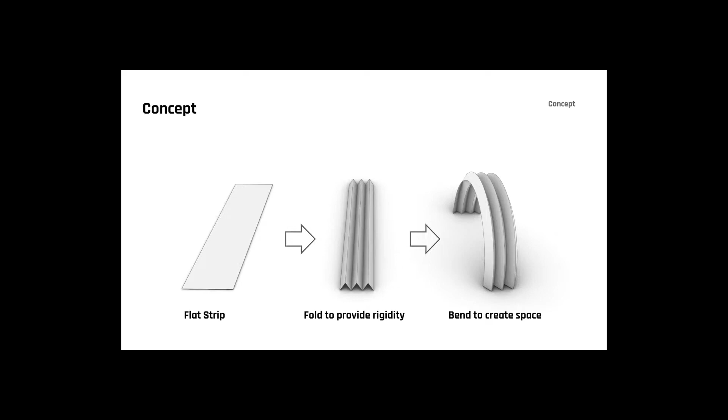So the project is for a little pavilion in the park in Singapore. And simply, we just use its circulation patterns on site to determine that there maybe should have 3 legs. And intuitively, we thought of creating like a folded shell to increase its strength as a shell structure - something that we think intuitively with concrete 3DP is something that we can achieve.

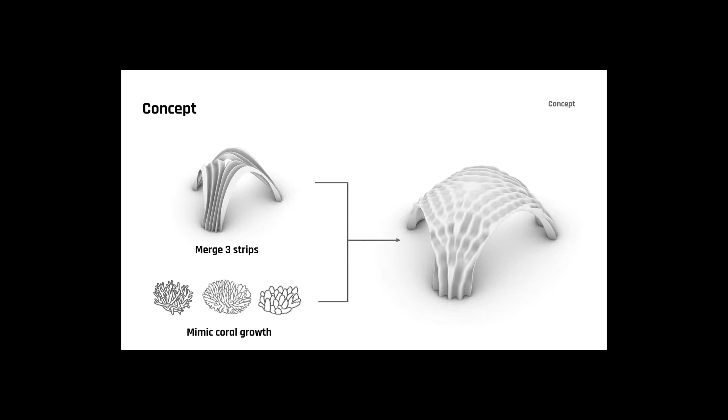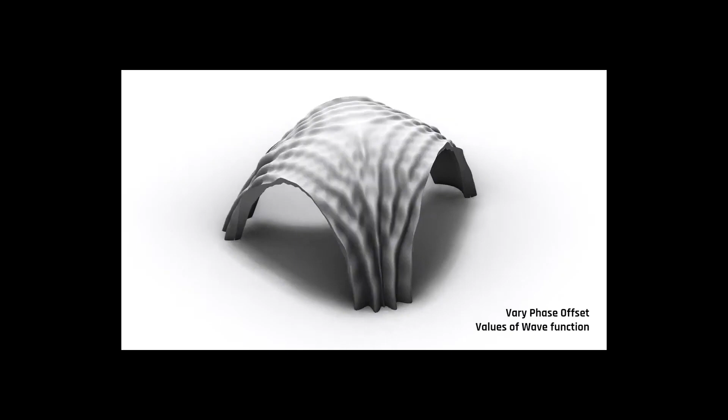The overall shell is floated up to form a vault. And then the wave functions modulate the surface texture, increasing the depth of the shell and giving it more rigidity. I mean, we could have put this in Karamba to test it, but just because of time, we did not.

And then we thought we'd go through a design and make process to validate some of our assumptions. So finally, we can have a catalog of a huge number of variations, but in the end, we picked one that is not so undulated, but at the same time enough to allow rainwater to trickle down these different valleys.

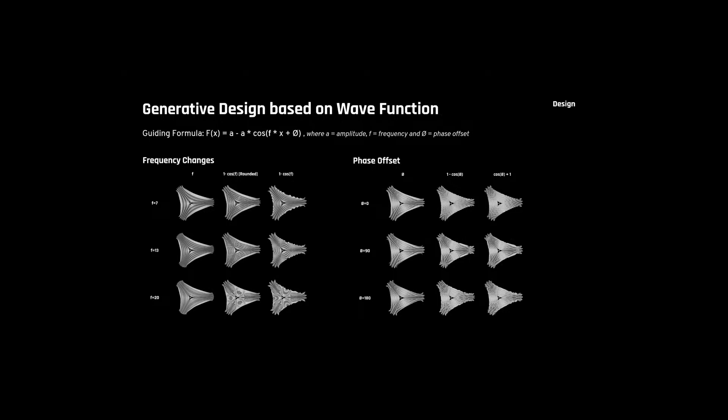So as a shell structure, we think of it as optimizing the compressive strength of concrete and reducing the amount of tension in the structure.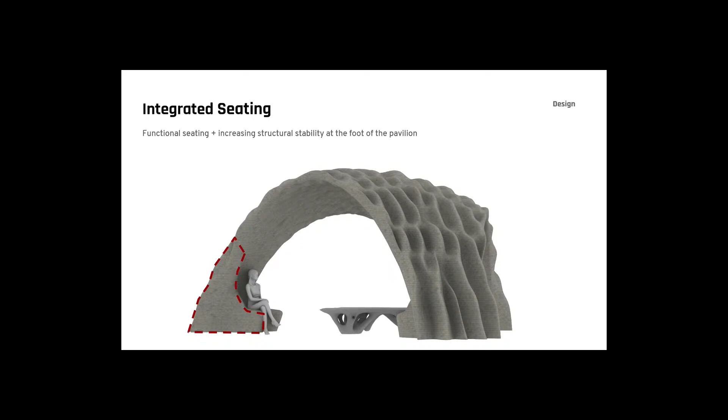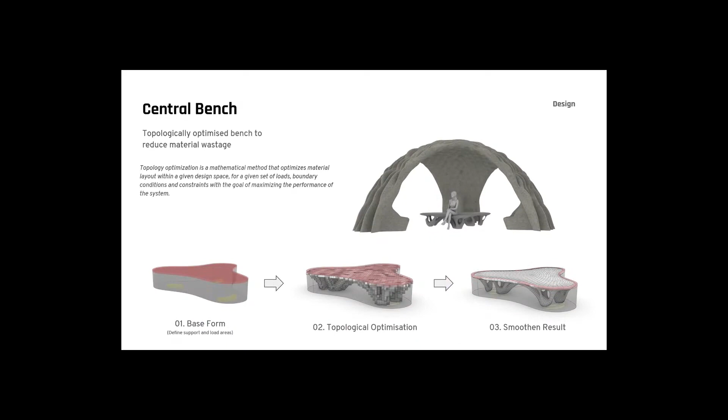Part of the base was made bigger to create a larger base and improve the stability. At the same time, we turned it into a bench. And for the central bench, we also wanted to test polymer printing as a formwork for casting. So this was topologically optimized to form a bench design in the middle.

So the size of the pavilion is about 20 square meters, so very small. And as a team, we think that's something we can test out together with Chip Eng Seng.

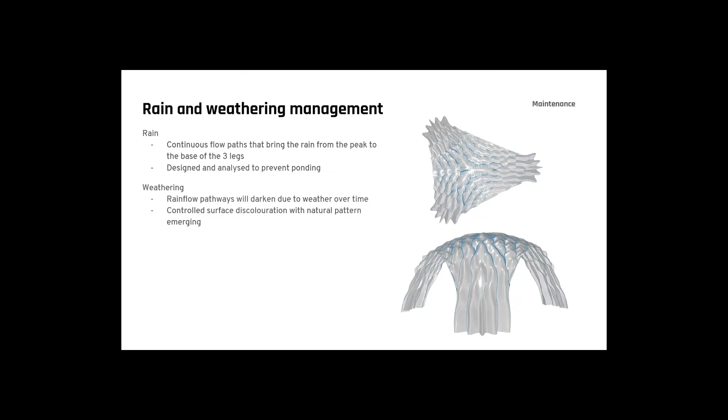So in terms of weathering, we designed into the structure these different valleys, and we imagine this will darken over time with the rain. And over time, instead of having to constantly maintain it, the depth in terms of color variation will increase the contrast of all these ribs and hopefully make it more beautiful over time.

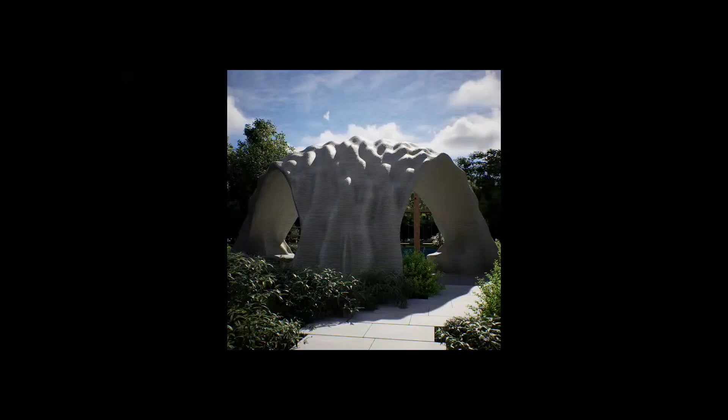These are some of the early renderings. I mean, I say thin in terms of its layer, but as a module, we think of it as a brick that is then stacked to form this vault, like a masonry vault. So overall, you can see that it's quite thick, but inside we were thinking of it as a hollow structure.

So a bit on the fabrication. We need to use this thing called non-planar printing. In order to optimize the entire shape, we had to calculate how much deviation in terms of angle every layer is going to have.

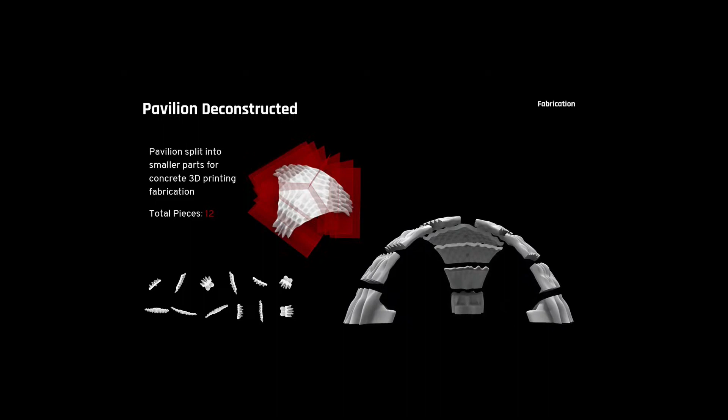So we work within a range of not more than 15 degrees, and that determines the number of parts that we have here. Also, each part is kept to around or less than 300 kg in terms of concrete weight. So each plane that you see there in red is what we're going to lay on the floor as we start doing the print. So it's always planar at that point.

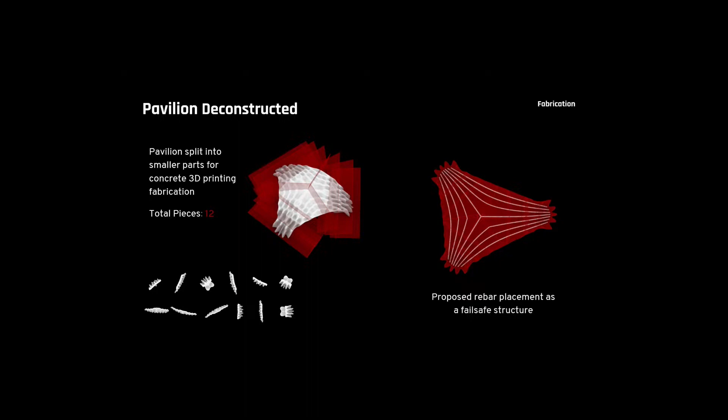And because it's imagined to be, we plan for it to be a live project, we build in some rebars as it's going to be assembled to increase the strength. So in order to have the rebar going through, we developed the G-code so that we always have a cavity that runs throughout the structure.

So the whole computational process gets linked from how we develop the form to eventually getting the G-code out for the non-planar printing.

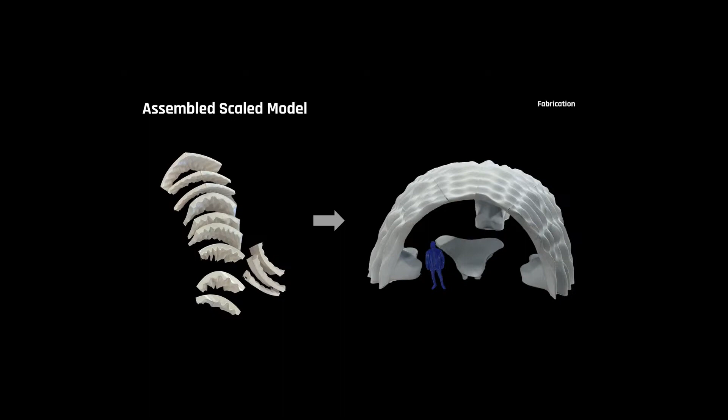So this we 3D printed in our own small 3D printer, just to demonstrate that it stacks together. So this was the first print. I mean, we stopped at this stage, just before a proof of concept, and started printing one part to see how non-planar printing can be achieved with Chip Eng Seng's equipment.

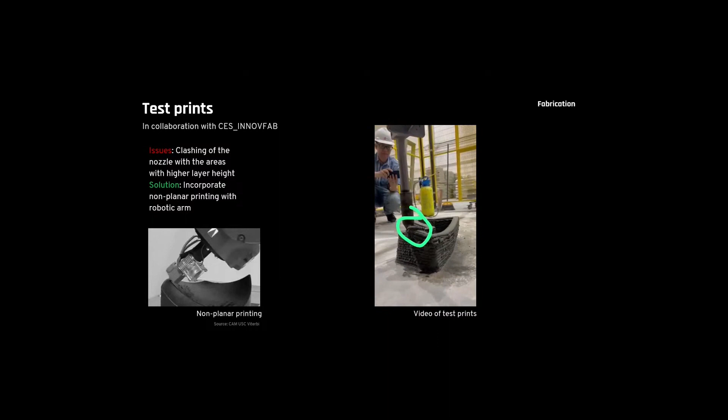And then we quickly realized that it's not that easy, where we have varying thickness over the entire layer, and that's where the clashing starts to happen. And so this information gets fed back into our script again, and then we hope to carry this forward.

To refine this, the project currently is on hold because the site at NParks is no longer available, but we are looking for a new home and hopefully to continue this research together with Chip Sing and Wohab.

So just to conclude, concrete 3DP, I think, for shell structure is an interesting thing because it tries to make it structural and a standalone building, just by using the property of the material itself.

So in terms of technology maturity, I think what Cobot and my fellow presenters have presented is already quite advanced. In terms of material innovation, there still needs to be, we still need to try out different consistency and mix of concrete to optimize and use its property to improve the strength.

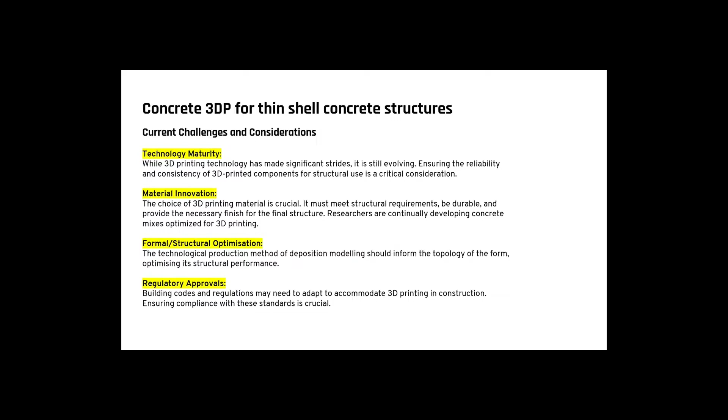But I think what I'm interested to really continue looking at is the formal topological optimization of the design in order to best make use of this property from concrete 3DP. And of course, then there are regulatory approvals which will make this easier to come into the market and make it possible. With that, I end my speech.